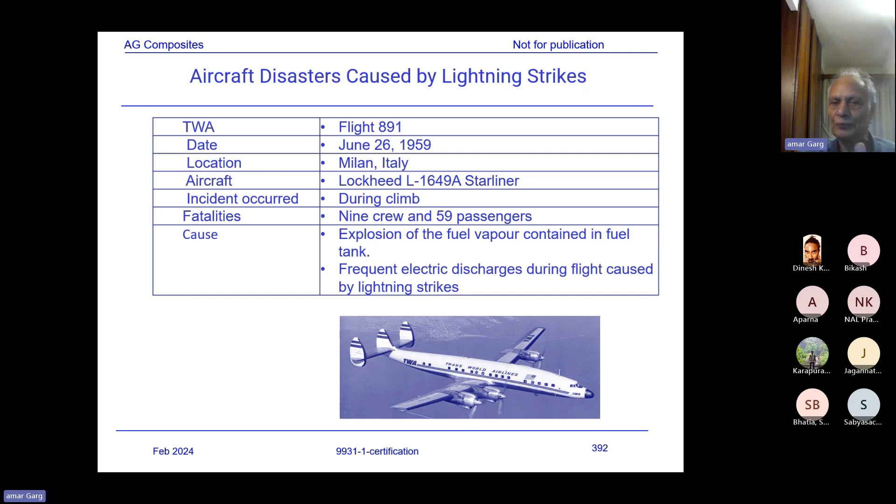So having said that, this is one accident, and there are other accidents I've reported here, one can look into Google also - this is a copy from Google. I won't go into the details, one can always search the details of each accident on Google. I'll send you this presentation once I finish the lecture so that you would have the final lecture notes.

Now let me go back - if there are no questions on this, I'll start the lecture where we left off last time and try to complete this maximum by this week. Hopefully I should be able to complete it. So I think I left somewhere...

So I was discussing last time the repair issues, and I left at that repairs.

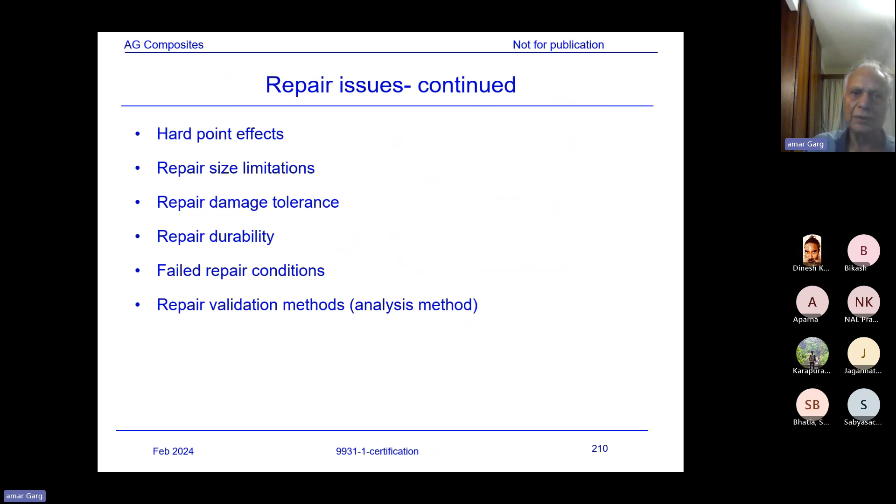Another thing for testing or compliance is production anomalies - when you are producing an article, there would be various manufacturing defects. Normal procedure is when designing the article and developing the data for allowables, you generate the data for the perfect design condition. But everything is not perfect in this practical world, and there might be situations where defects occur in production, which are quite common. As the production process matures, the number of discrepancies reduces significantly, but in the beginning there might be more. You try to understand the causes of those discrepancies and the remedial actions. So as the production line and designers gain experience, the anomalies also reduce.

But some of the anomalies which I have listed here, just for information - in composites, one of the things which happens quite often is wrinkles. Especially where there's a transition like curvatures, wrinkles might occur there, and of course in plane laminates also they occur. During the 787 program, initially we used to get quite a bit of wrinkles in some of the parts.

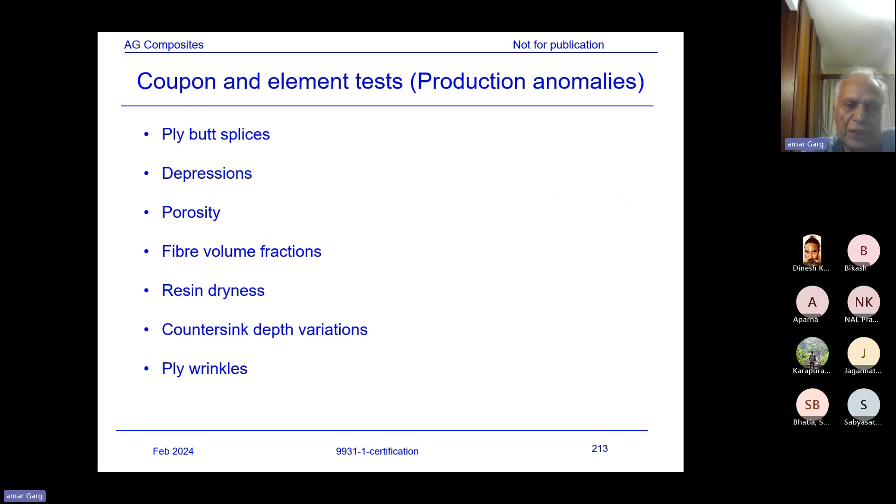So coupon element test production anomalies I've just listed here - splices, depressions, porosity, fiber volume fractions, because you will get a laminate which might have higher or lower volume fraction than what you designed for. Then you have to develop allowables or design values, knockdown factors for that. Allowables are basically for the basic design, and any other values become knockdown factors over that - fiber volume fraction, resin dryness, countersink depth variations, ply wrinkles, fiber breakouts at hole edges, delaminations, cure conditions, cooling and heating rates, cure time and temperature variation, extended cure cycle, off-axis issues. So there are lots of production anomalies for which you have to develop design values or knockdown factors - the effect of those defects, that's what I would call it.

Any questions so far?

No. Okay. Hello, Professor. Yes.

Actually, how do we assess, how do we know that these defects are actually existing in the component? Do we need to do NDT, or how to assess those defects so that we can do the coupon level test? Yes, good question.

When the part is produced in production, it goes to inspection. The quality inspector has to check and consider what the design drawing says. Suppose you get a hole that is being drilled, and you notice fiber breakout on the exit, the layer is broken. Naturally, that's a defect. So the quality inspector has to pick that up and report the defect. That is called Material Review Board, MRB.

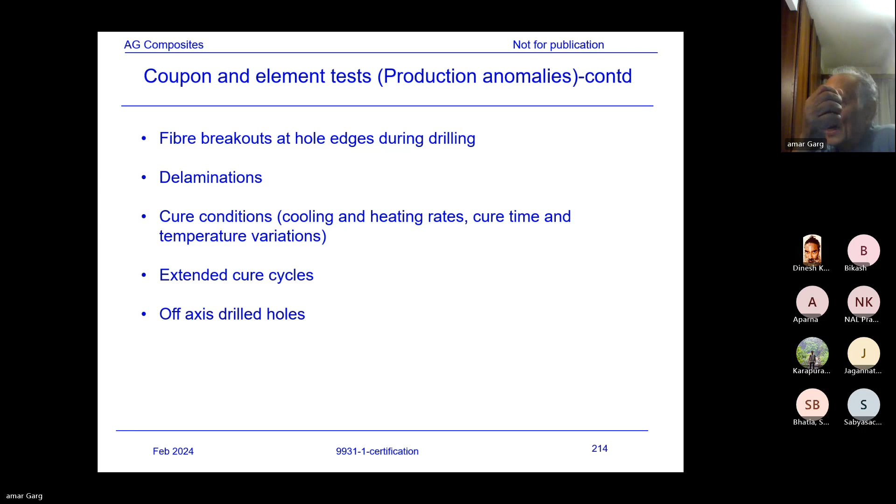So all these defects—in fact, I have not listed all of them. Misdrill, where you are trying to drill the hole here, but sometimes the drill bit may cut the hole a little bit off.

So naturally, you have to inspect it and see whether you can accept those defects or you have to repair them. Suppose there is a drill bit which has caused a little notch. Now what do you do to repair? You can't leave the hole like that. So normally, you will see whether you can use a larger hole and a larger fastener, if the fitting and region can take it, or use a plug, like a metallic plug. So there are different ways to fix those defects, but one has to develop the procedure.

I'm sure these things NAL would be doing, because even if you're experimentally doing the production, naturally these defects will be there. The possibility is there because everything is not perfect in this world. What I designed the component for doesn't mean production is going to be exactly that way.

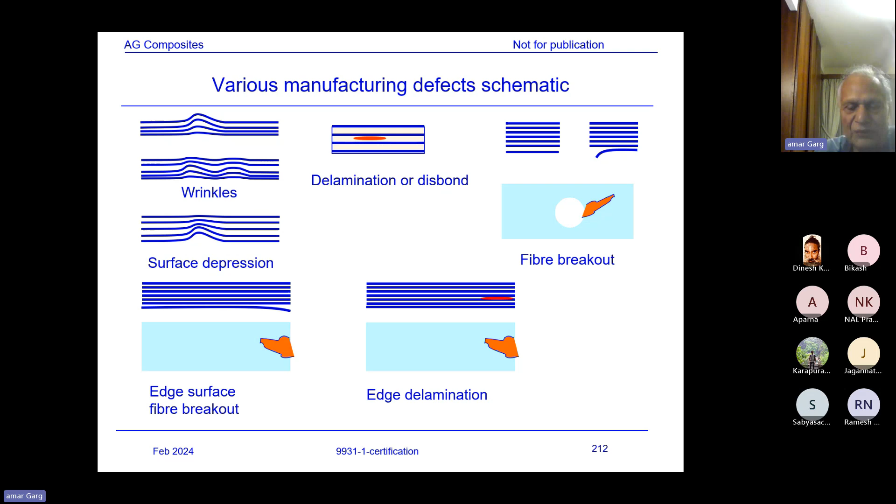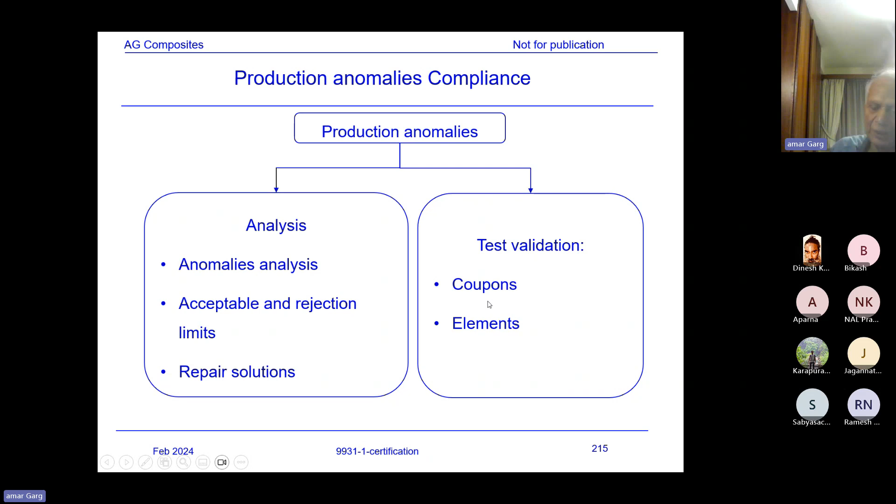If there are no more questions, I can proceed further. So basically, production anomalies compliance - as I've already discussed - production anomalies, you do the analysis, acceptance, rejection limits, then repair solution. So all the solutions you have to work out, which again, I say, is not a one day or two day job. It's hundreds of thousands of hours of job, all this, but it depends upon the program you're dealing with.

Vacuum assisted resin transfer molding - NAL has produced a part using resin transfer molding or VARTM. I don't remember what exactly NAL calls that process - resin transfer molding. So essentially, for vacuum assisted resin transfer molding, schematically the process is: tool preparation, apply release agent, then lay up the preform. The preform is basically a dry fabric - of course, it's not totally dry, it has some binders so that you can lay it up and the layers stick together. Then you put that in a vacuum bag and suck the vacuum to consolidate the assembly.

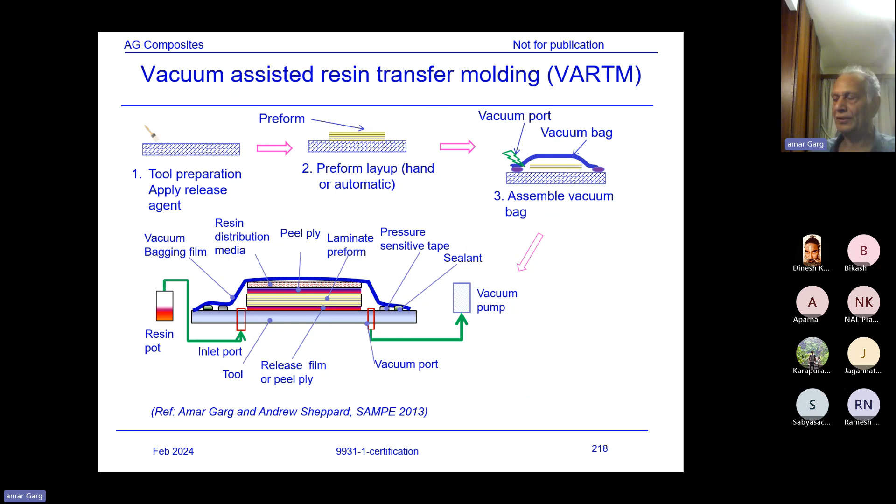Major materials processes: autoclave. I think I've lost some slides here, one of the autoclave slides is deleted. I don't know how I'll put that. But in the autoclave process, you're doing a similar process, but you are putting the assembly in an autoclave. An autoclave is an oven which is pressurized and can be heated up. However, the autoclave process is more expensive because the larger the autoclave, the more expensive it is to make for fabricating larger parts. That's why resin transfer molding processes are being used now, non-autoclave, which are cheaper. But it has its own advantages and disadvantages, which I'm not going to discuss now.

Autoclave process, VARTM - that is vacuum assisted resin transfer molding process. The materials for that: dry fabric, resin, binder, closed cell foam, sandwich. And for the autoclave it's a prepreg. Prepreg is fabric or tape coated with the resin, and core for sandwich structure.

Now, one thing is, if you are producing a component which needs a sandwich structure, you can't use resin transfer molding directly. The only way you can use resin transfer molding is, rather than using a Nomex core, you need to use a closed cell foam so that resin does not fill the cells. Because if you have a Nomex core and try to inject the resin, all the cells in the core will be filled with resin. So if you want to produce sandwich structures, normally you have to use the autoclave process.

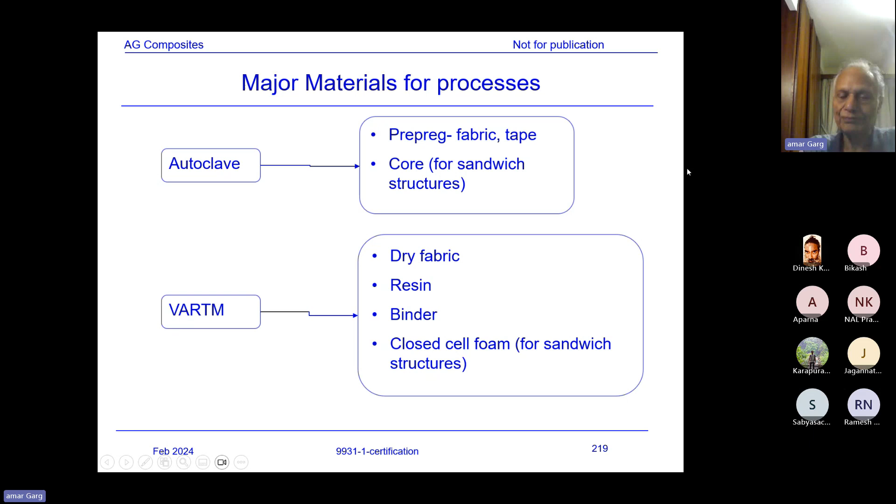Testing and validations. Now I consider an important issue over here for certification: testing and validations.

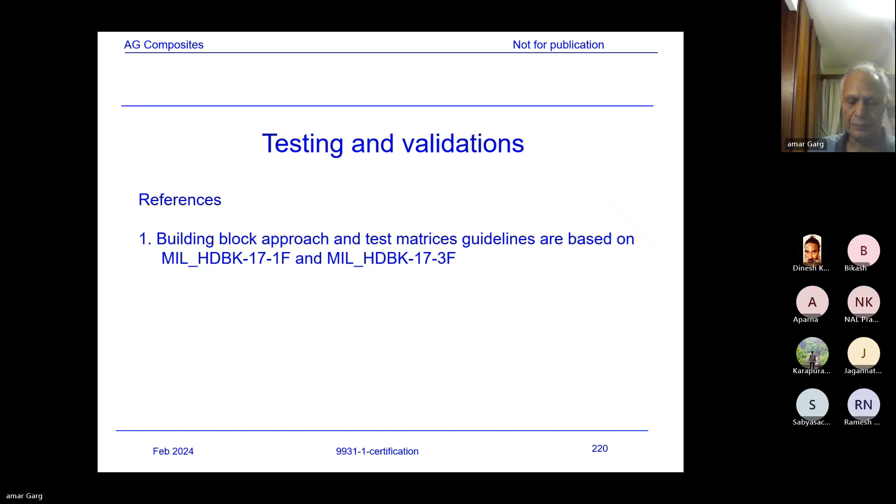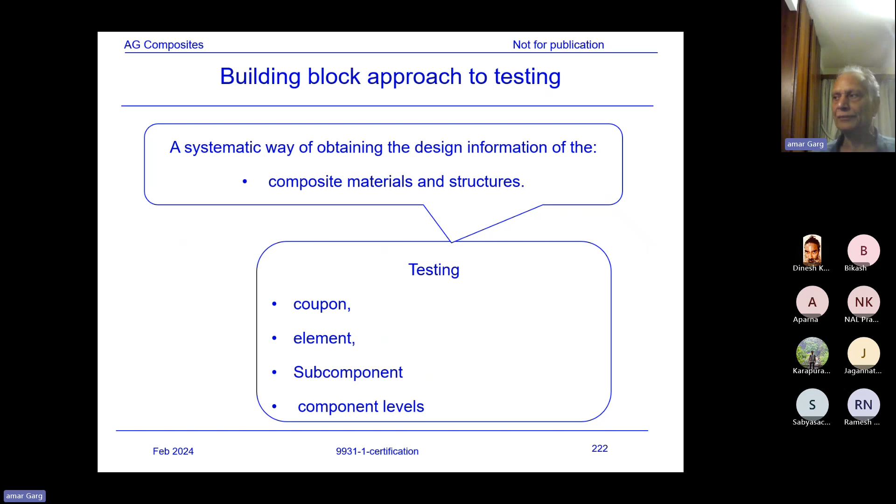We use the building block approach in justifying the design and testing of a component. Now, what is the building block approach? Building block approach for testing is a systematic way of obtaining the design information of composite materials and structures by testing coupons, elements, subcomponent, component. So you are generating - I'll show you the flow diagram - basically you are developing the allowables, then verifying the design using a building block approach. It's right to say this is a systematic way of obtaining design information, which develops the allowables, verifies the design, and finally gives you the perfect design.

Now, another definition: building block approach is the substantiation process using both testing and analysis in a program of increasingly complex levels. So you have a testing block, you have an analysis block, and this is a pyramid basically - increasing complexity for testing and analysis, which provides an efficient product.

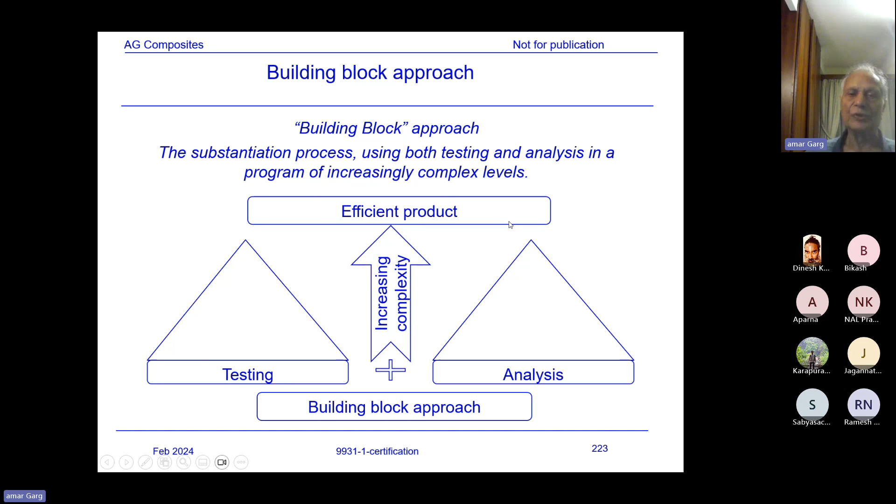Now, the advantage of the building block approach is reduced program cost and risk while meeting all technical, regulatory, and customer requirements. Because when you start from the coupons, they generate the allowables, design values, then you test some elements, then subcomponent, which will verify your design, and then component. So you are following a systematic design approach, and if you have a problem, you would know it in the beginning rather than at the end.

So suppose, as I had explained, the point design approach does not involve a significant amount of testing. That becomes expensive because you don't know some of the risks which may be there, and you only know after the component is produced, then some unknown risk appears. So the best approach is the building block approach, by which you will remove all major risks and surprises in the design.

The objective is to reduce program cost and risk while meeting all technical, regulatory, and customer requirements, and to make the design development process more effective in assessing technology risks earlier in the program, so you know the risk early on.

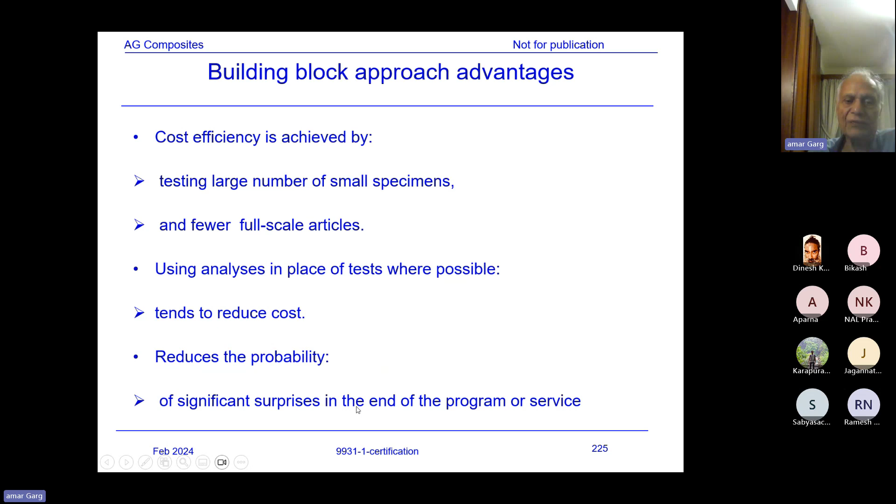Using analysis in place of tests where possible tends to reduce cost and reduces the probability of significant surprise at the end of the program. So it's basically a combination of analysis and testing.

This is a schematic of the building block test. In this block you have coupons and small elements, which are generic specimens, giving you a database of allowables and design values. Then you test some details which have structural design features, just to verify those features. Sometimes the coupons and elements may not cover the type of loading you might get in the details, so you verify the different loading systems which might be present in the elements, details, subcomponents, and components, which contain the structural features and provide and verify the design.

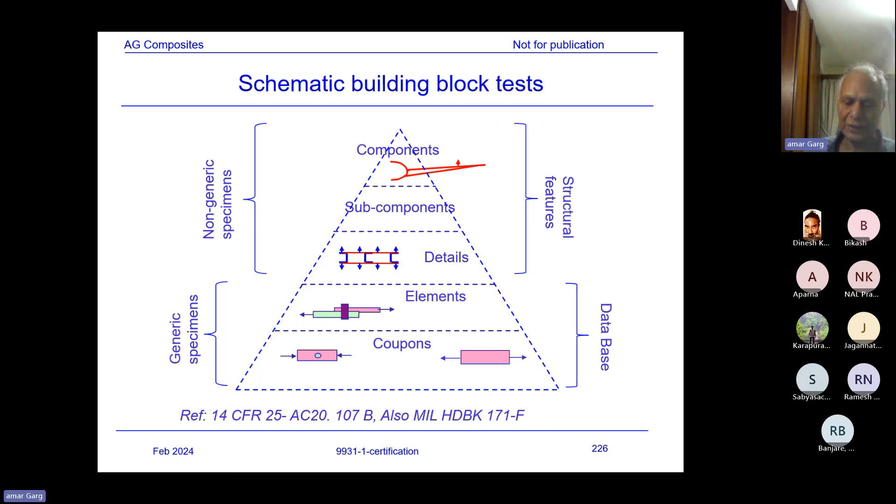Now, the way the building block approach works - this I have taken from MIL Handbook 17 - it shows three groups: group A, B, and C. Group A provides the material specifications and allowables development.

So the first block is material screening and selection. When you are launching a program with new materials, you have to select them. Suppose you do not have the materials to be used in the design - naturally, you're going to select the materials.

Block one tells you the procedure for selecting and screening the material. The second block, once you've selected the material, is materials and process specifications. The importance of this is that once you have the material, you have to develop specifications so you can provide them to the manufacturer, who then has to supply material according to your specifications. Unless you develop the specifications, you cannot provide that data to the manufacturer - that's the important part of this block.

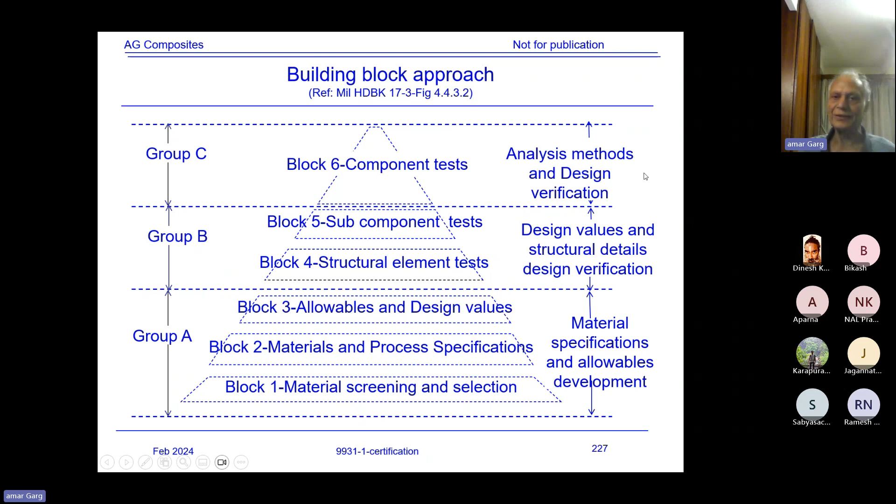Then finally, you do a component test in group C, which is analysis methods and design verification. Now let's discuss these blocks in detail, starting with block 1: material screening and selection.

In material selection, the objective is initial evaluation of new material systems under various environmental and loading conditions. You have to select the material based on some criteria - either you simply consider that you have a manufacturer, like Hexcel, who has materials like fabric, resins, or prepreg, which you'll just buy from them. That could be fine as long as it's useful to you.

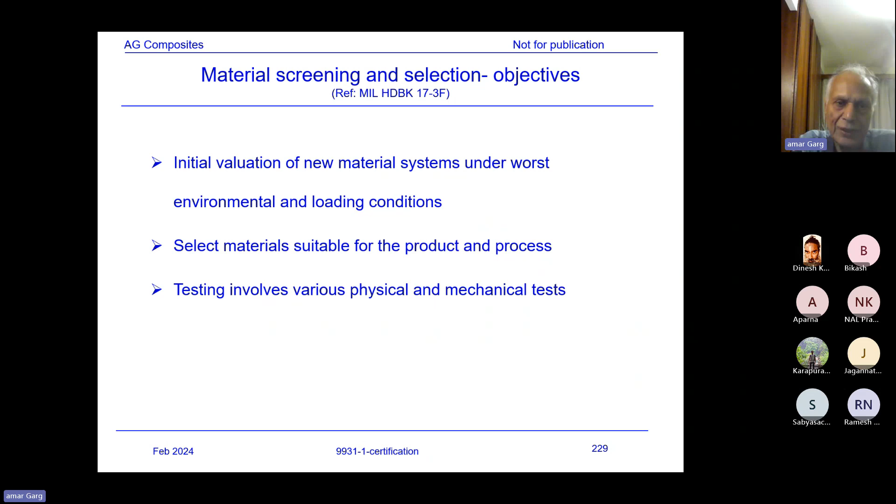But if you're looking for a material that is really optimum for your processes and design, you might have to do a market survey and then select the material based on that. You assess based on evaluations from manufacturer data and some in-house testing, selecting material suitable for the production process. Testing involves various physical and mechanical tests - material screening and final material selection.

So you have fibers, fabric tape, binders, resin, and prepreg. Fibers are clear, fabric tape is clear - but what is a binder? Those of you familiar with the resin transfer molding process might understand the binder more clearly.

The utility of the binder: if you are buying a dry fabric for your resin transfer molding process, and you lay up the dry fabric, it's very fluffy - you can't lay it up and make a preform.

Suppose you have to lay up 20 layers, what are you going to do? They are not going to stick to each other at all, they will remain separated. So the fabric will have some kind of resin spray, like 3 or 4% of resin sprayed on it.

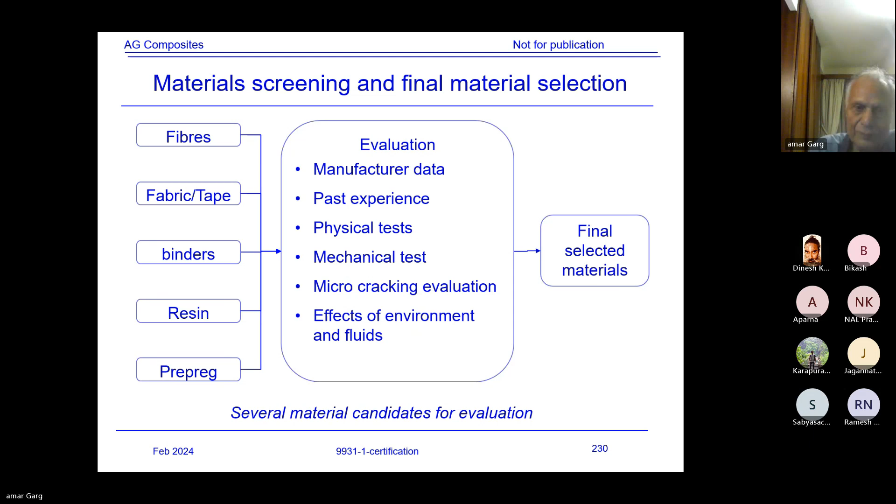Properties for evaluation - for fiber, you normally look into tensile strength, modulus, elongation at break, fiber diameter, density, and cost. For fabric or tape: areal weight, weave type, drapability, fabric or tape tolerance, and cost.

I'm not going into the details of each property because I've discussed various details on how you have to assess them. But these are the properties - just a general idea I'm trying to give you in this lecture. One would try to assess based on that.

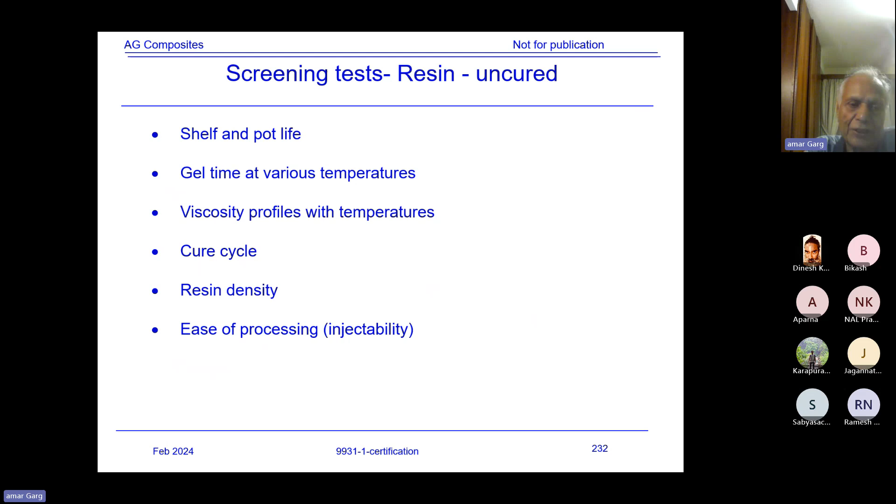Screening tests for resins, uncured: shelf and pot life, gel time at various temperatures, viscosity profiles at temperatures, cure cycle, resin density, ease of processing, that is injectability, density, tensile and compressive strengths and modulus, fracture toughness, moisture sensitivity, adhesion with fibers, glass transition temperature, dry and wet, material operating limits, thermal coefficient of expansion, chemical shrinkage at cure temperature, coefficient of moisture expansion.

Now it's getting a bit heavy for you people, but each of these properties has to be assessed. And naturally, if it's a design program or development program, all these properties have to be evaluated - whether through in-house testing or based on manufacturer data that has to be assessed.

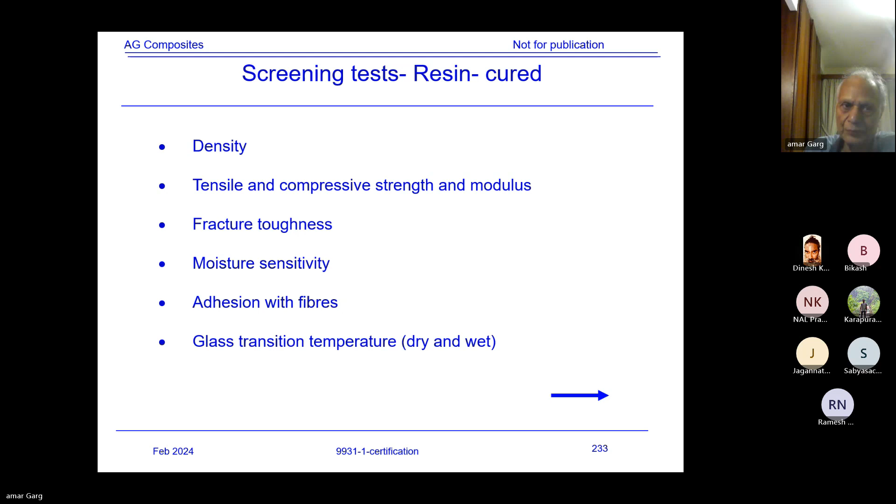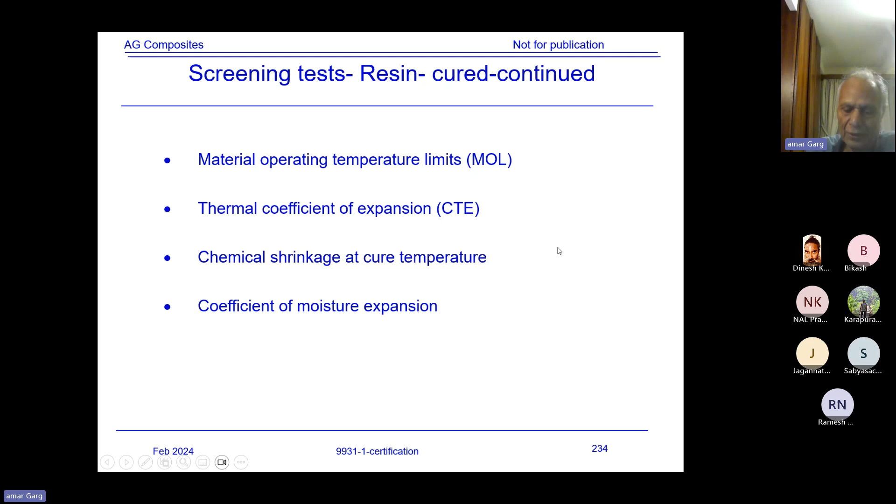Now, one of the things I have listed is material operating limits. What is this material operating limit? I thought I might just try to explain the meaning of material operating limits. What happens

in the composite, these matrix materials, which are organic matrix materials, are sensitive to moisture and temperature. So with increase in temperature and moisture content, the properties degrade. That means your usable temperature depends upon the material properties when they start degrading. So naturally, when selecting the material, we have to see what temperature we can consider as the allowable limit for operation of that material.

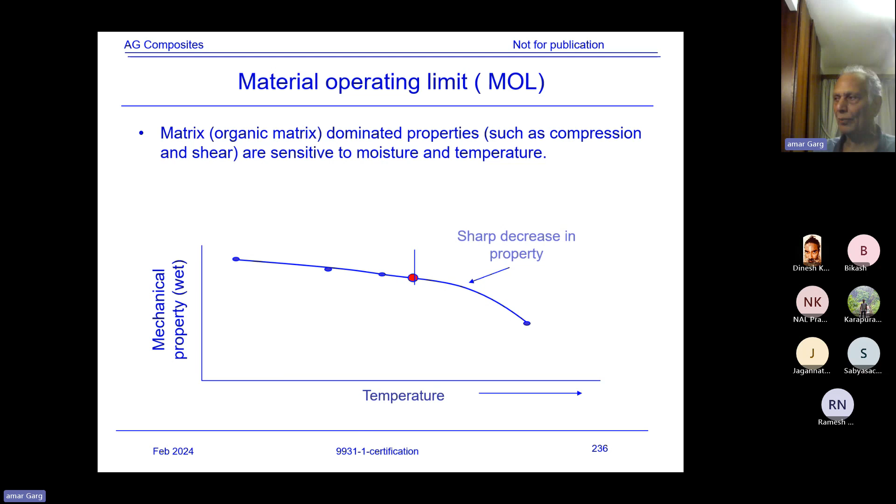So that is why you try to define a material operating limit. Material operating limit is defined as a characteristic temperature beyond which a dramatic reduction in material property would occur. Like open hole compression, which is matrix controlled, will degrade significantly after a certain temperature. Same thing with shear. The reduction in material properties may become irreversible beyond MOL.

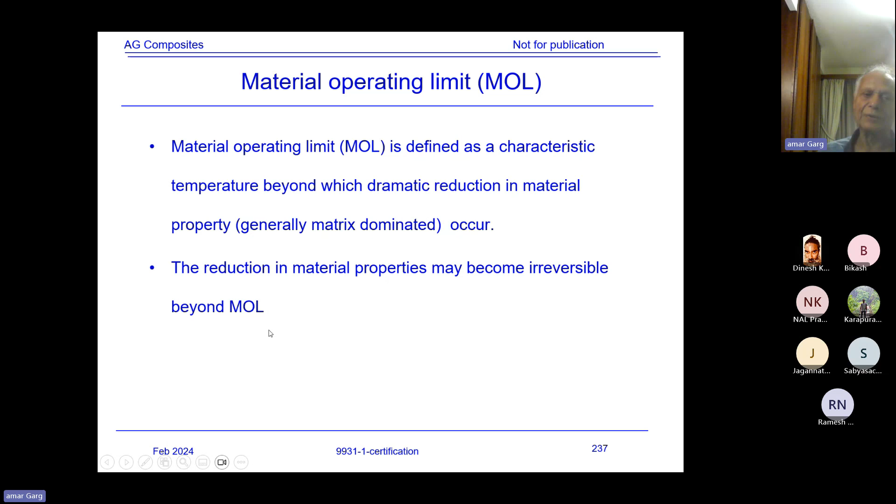Now, MOL criteria - there are two approaches by which you can define the material operating limits. One is based on mechanical property, normally in-plane shear modulus and open hole compressive strength degradation with moisture and temperature. The second is the wet glass transition temperature. So MOL is the lower of the mechanical property and TG approaches.

I've shown this schematically - the mechanical property. What you're seeing qualitatively is a sudden decrease in the material property at this temperature, which we could call T degradation, or if defining it with glass transition temperature, it could be called TG wet.

So the material operating limit we'll define as some T operating maximum, beyond which we will not try to operate our aircraft or material. We will design it for that.

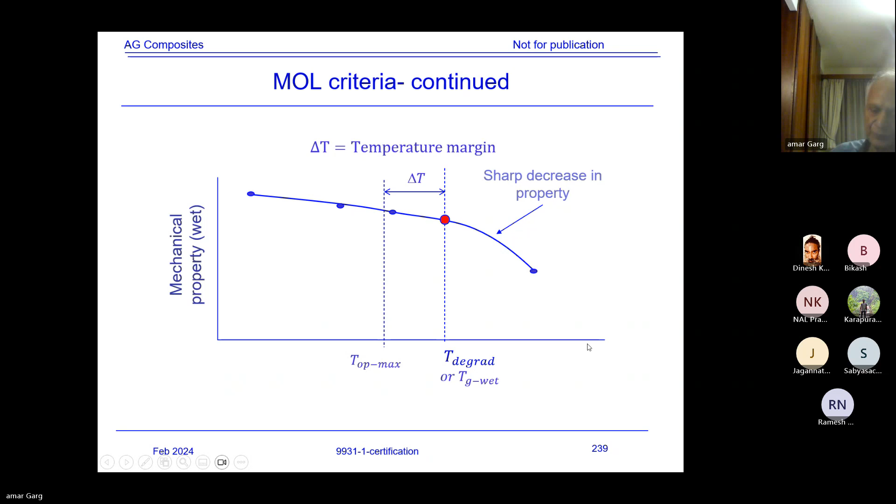I've shown delta T1 as 50 degrees. According to FAR, the operating limit should be the degradation of glass transition temperature minus 28 degrees centigrade, or 50 degrees Fahrenheit. Now for delta 2, I don't have any specific criteria, but I think one could use 50 degrees Fahrenheit for delta T2 also to define this.

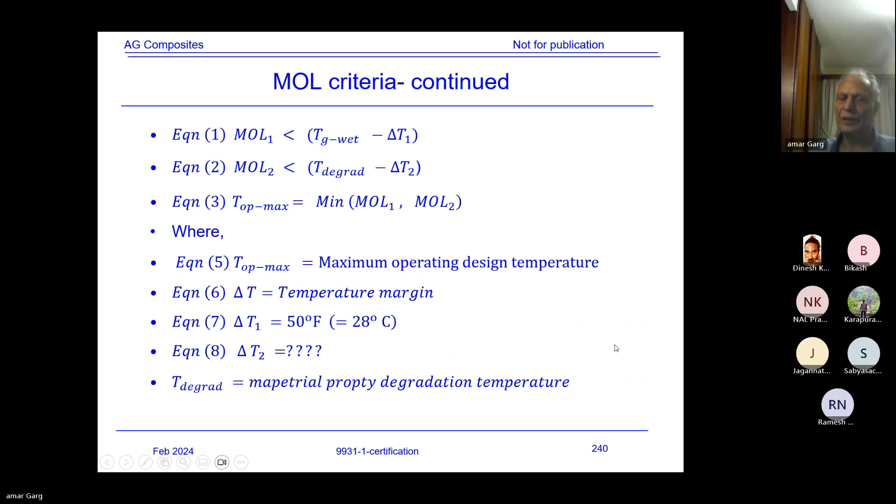So, any question on this material operating limit?

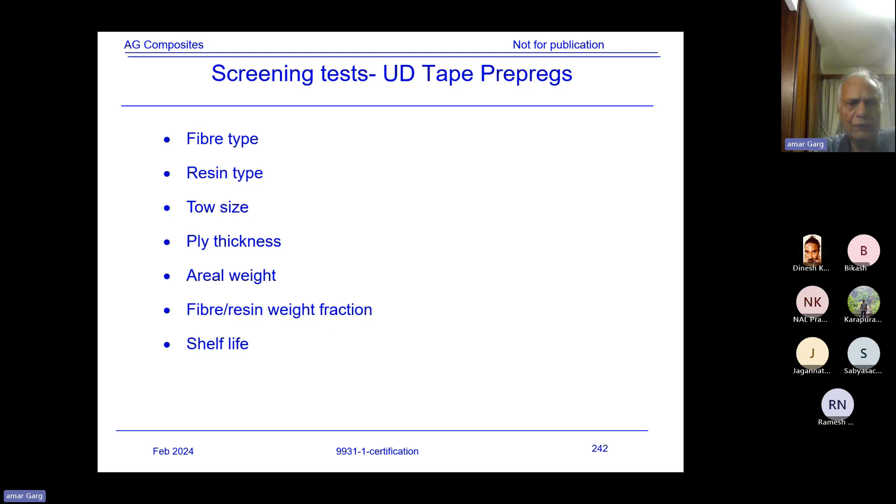Screening test for UD tape prepregs: fiber type, resin type, tow size, ply thickness, areal weight, fiber resin weight fraction, and shelf life.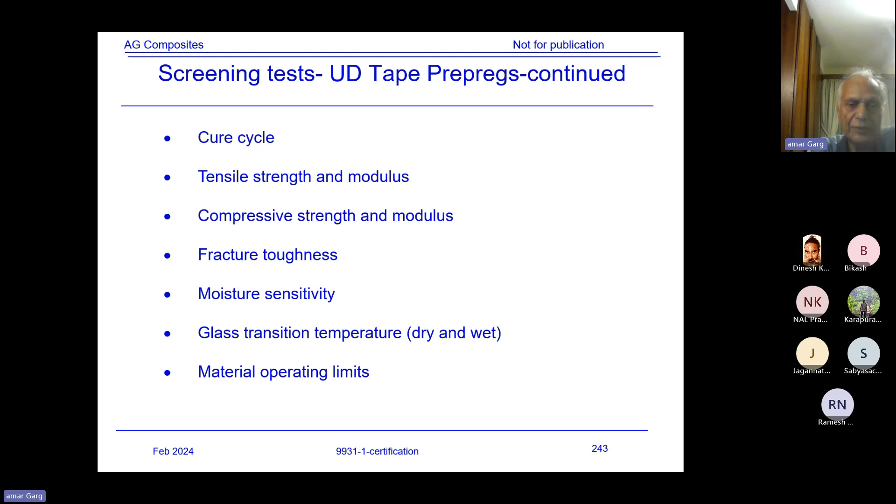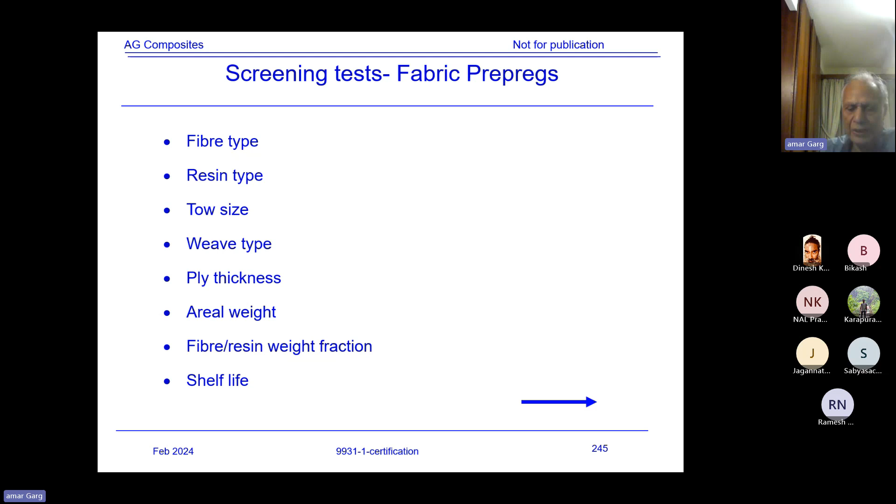Fabric prepregs, I'll just pass this quickly because they are similar to what we've said for the tape prepreg, so I won't repeat it.

Binder material, what are the tests normally done? Binder provides the bonding to dry fabric for preforming and may enhance interlaminar fracture toughness. Evaluations include fabric adhesion characteristics, glass transition temperature, processability, density, areal weight of binder film, effect on fiber matrix interface due to binder, and effect of binder microcracking.

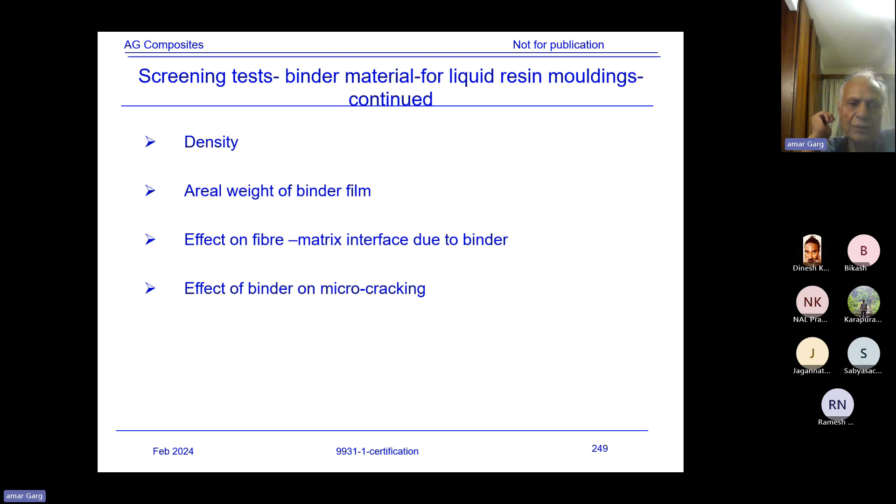So various properties one would try to evaluate. Again, I won't go into the details.

Now, screen test. Basically one could use these coupons as shown schematically: 0 degree unidirectional tension, 90 degree unidirectional tension, 0 degree unidirectional compression, 90 degree unidirectional compression, in-plane shear, open hole compression, open hole tension, CAI, and then the fracture toughness tests, double cantilever beam G1C and edge notch flexure G2C test. So various tests.

Again, I'm not putting the details because I've just shown schematically various coupons one could use.

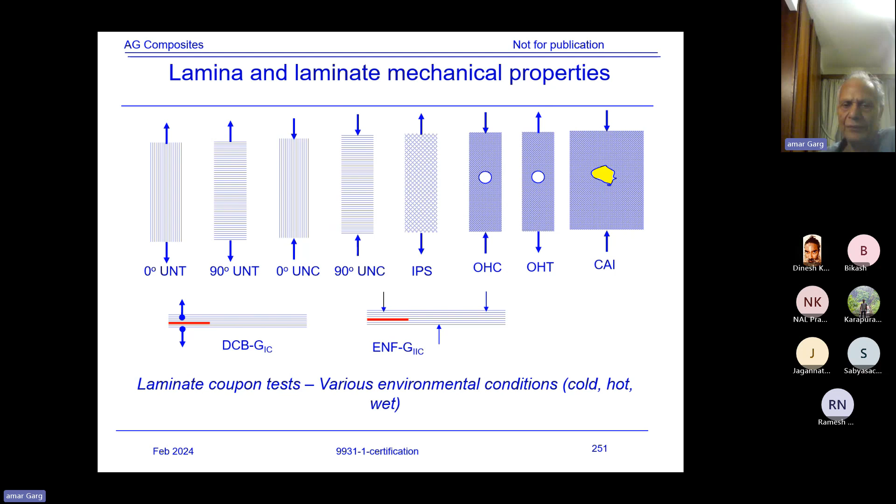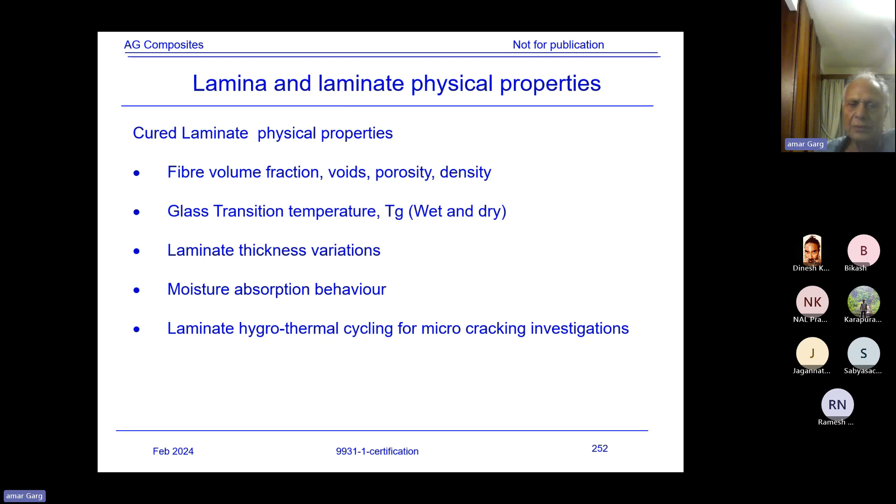Cured laminate physical properties assessment: fiber volume fraction, voids, porosity, density, glass transition temperature, laminate thickness variations, moisture absorption behavior, laminate hygrothermal cycling, and matrix microcracking investigation.

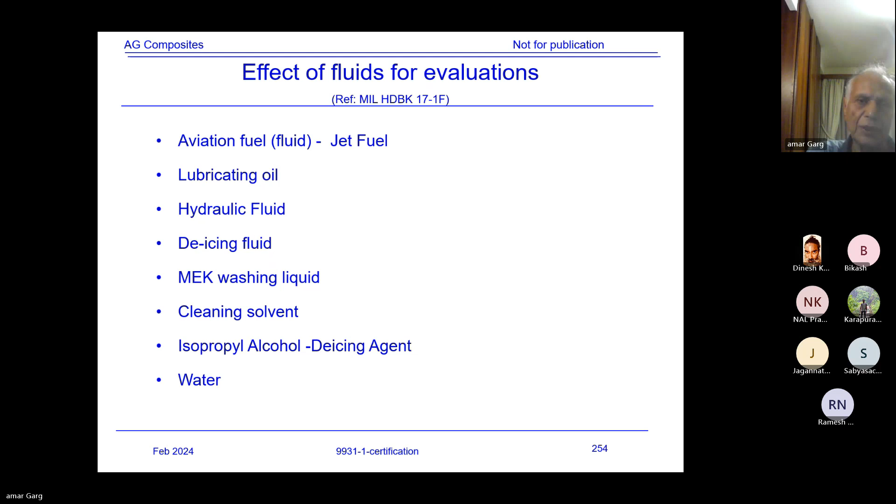So various tests. Effect of fluids evaluations: various aviation fuels, lubricating oil, hydraulic fluid, de-icing fluid, MEK. So various aviation fuels, one has to consider the effect on the composites. There are standard tests provided in ASTM standards, and MIL Handbook 17 also provides some details. One could look into that, but it's necessary when we're trying to evaluate new materials to study the effect of various fluids.

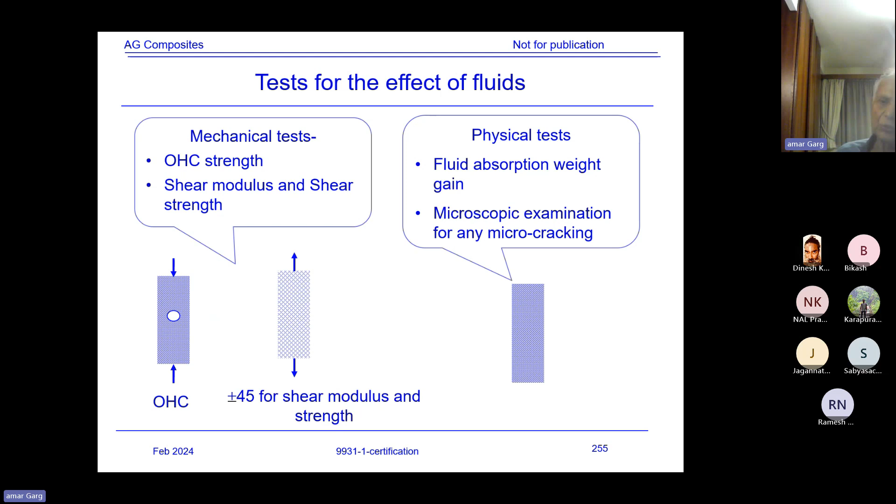And generally the test for fluids would cover the critical properties for the matrix, which are normally open hole tension and compression, and the shear modulus and strength, and some physical tests like fluid absorption, weight gain, and microscopic examination of any microcracking.

Laminate microcracking evaluation. Generally, what happens when you're trying to evaluate microcracking is that we cannot accept microcracking in our composite materials. Some materials might develop microcracking due to environmental effect, and we have to discard that material. That's why we do testing to ensure no microcracking is occurring.

If there are 1 or 2 cracks after 2,000 hours or 1,500 hours, you might accept it. But if there's a significant amount of microcracking, you reject the material and look for another material that doesn't develop microcracking. This is an important issue for composites.

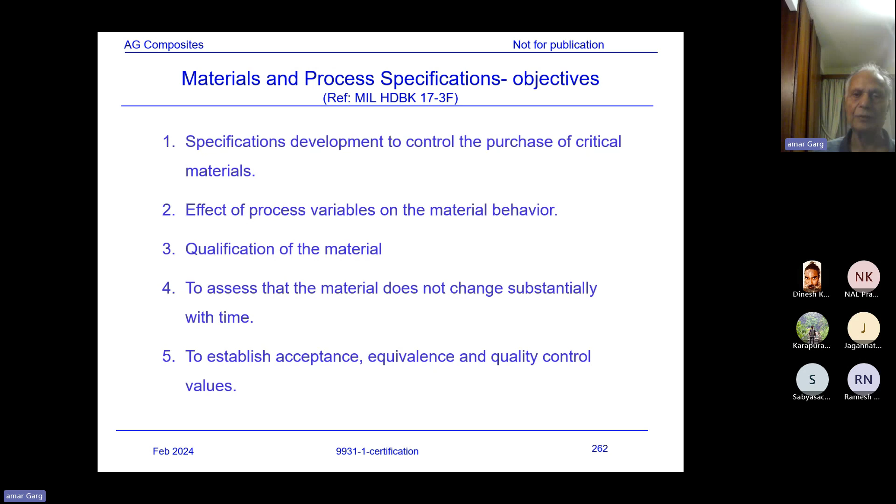So basically these two items are very critical: this one and this one - to purchase the material you develop the specifications, and to establish acceptance, equivalence, and quality control values. And how do you do that? You test different coupons for different properties and generate the values for material specifications.

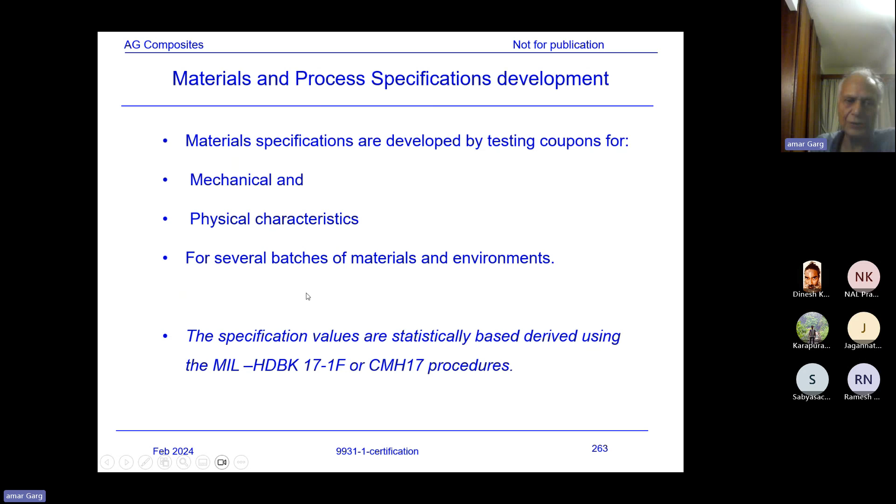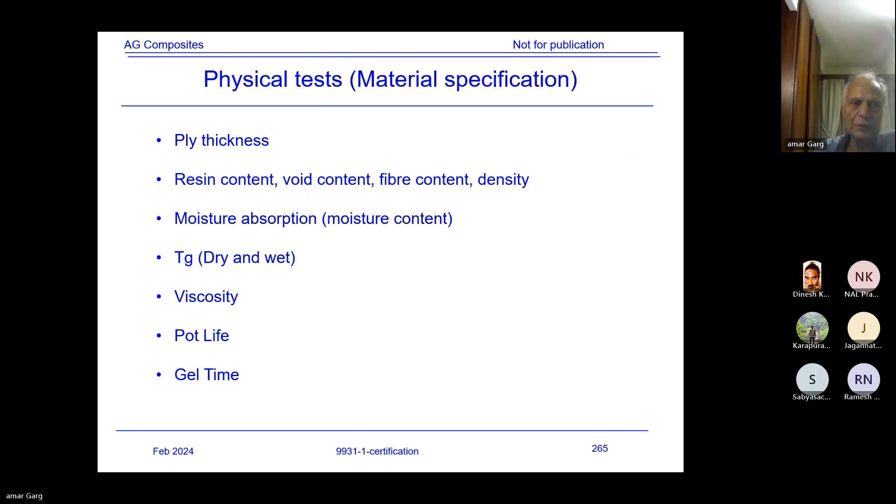Material specifications are developed by testing coupons for mechanical and physical characteristics for several batches of materials and environments. This is the same picture I showed you earlier, so similar coupons are done. Physical tests, ply thickness and all that, I'll skip that.

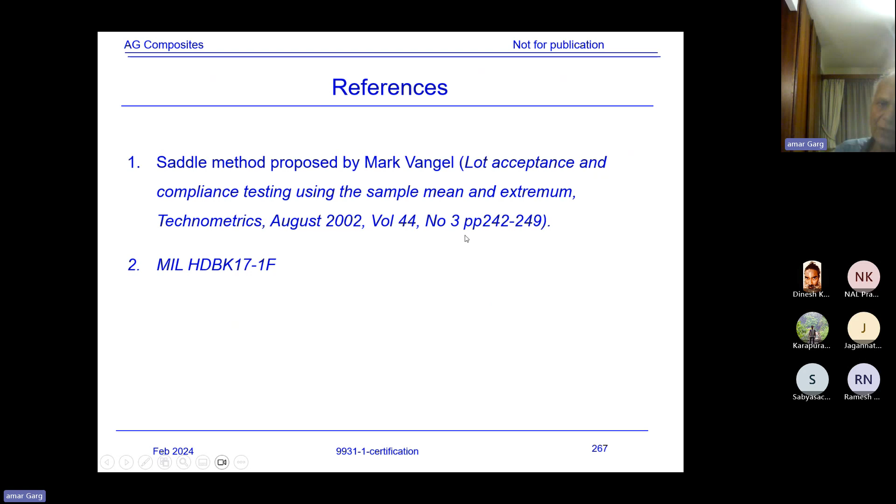Material specifications data analysis - I've given you the reference. Suppose somebody wants to understand how to analyze the material specification values, this is one of the references, or MIL Handbook 17 could also be used.

What you do here, when you have done the testing, is try to determine the maximum individual values and minimum individual values. There are some statistical methods given in that reference. The minimum individual is mu minus K1 sigma, and maximum individual is mu plus K1 sigma, where mu is the average value and sigma is standard deviation.

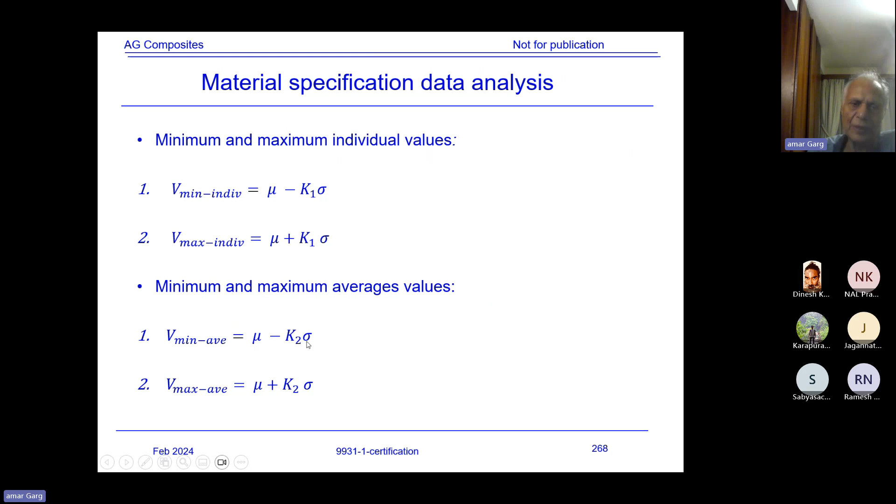K1 are the parameters given by that reference, and minimum, maximum, average values are given by this, where mu is mean, standard deviation, K1 is the extremum parameter, K2 is the mean parameter, and all the details are in this reference.

I won't repeat that. Then you develop a report for the material supplier, where various properties like minimum individual, minimum average, maximum individual, maximum average are provided based on this analysis. This goes to the supplier and your quality control department. The material supplier will then supply materials that comply with your requirements, since they do conformance testing when supplying the material, and you'll compare the values. Sometimes you might also run in-house tests just to check or verify those values.

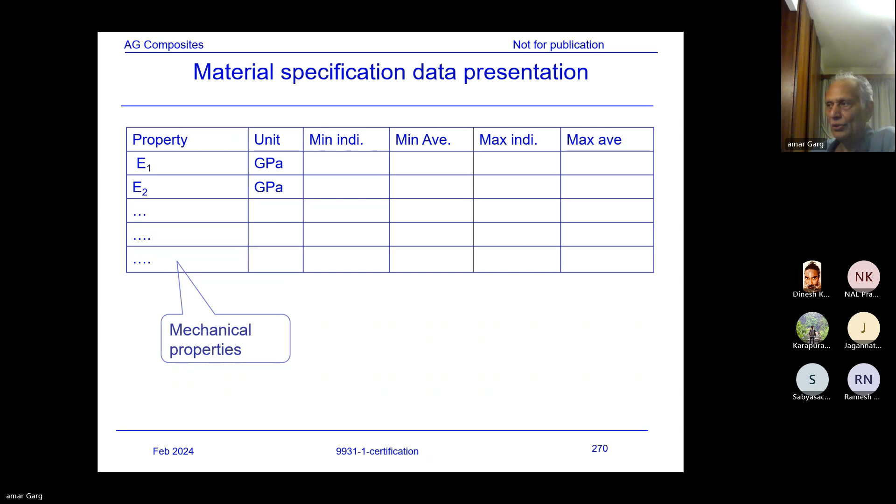Allowables and design values. Now, any questions so far, please do ask. Or is it not useful?

Hello? Yes, sir, it is useful. We'll ask questions, sir, please complete. We'll find some questions, okay.

I think so - allowables and design values now. Material allowables, as per 613, material strength values must be based on enough tests of material meeting approved specifications to establish design values on a statistical basis.

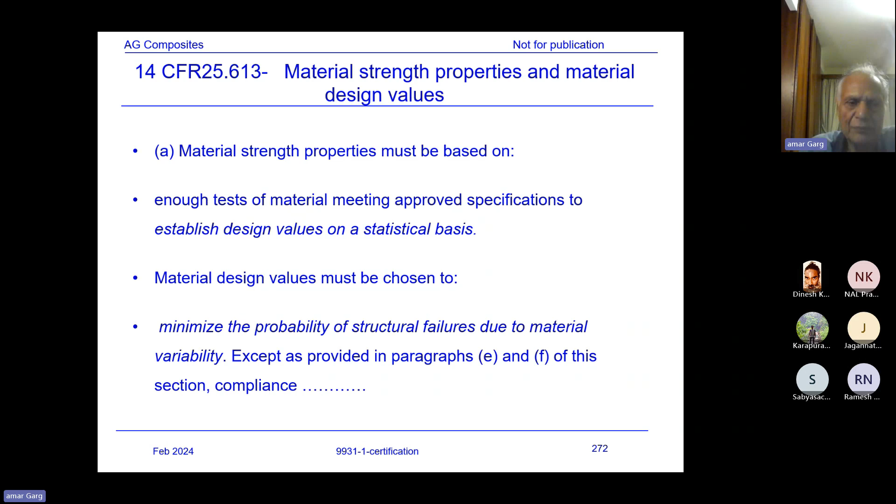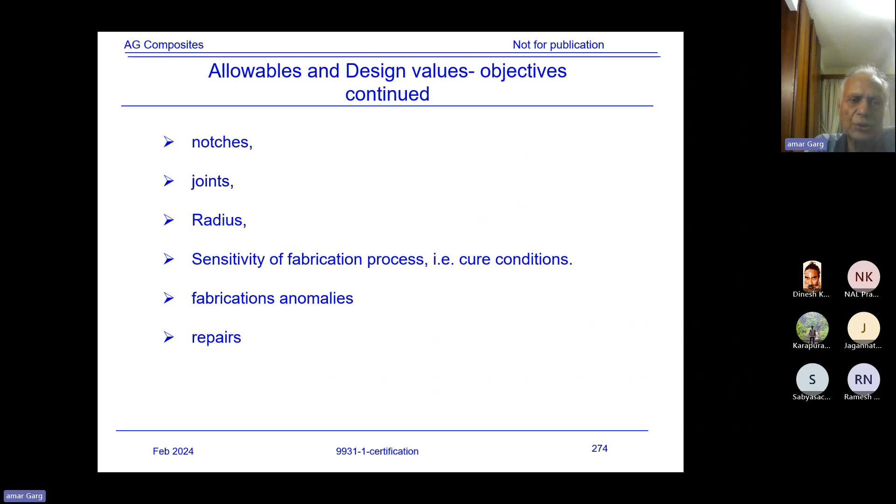So basically the allowables are developed using a statistical basis. Material design values must be chosen to minimize the probability of structural failures due to material variability, except as provided in the relevant paragraph of compliance. The purpose is to provide firm material allowables suitable for design, accounting for effects of layup, stacking sequence, laminate thickness, environment, notches, joints, radius, sensitivity to fabrication process, cure conditions, fabrication anomalies, and repairs.

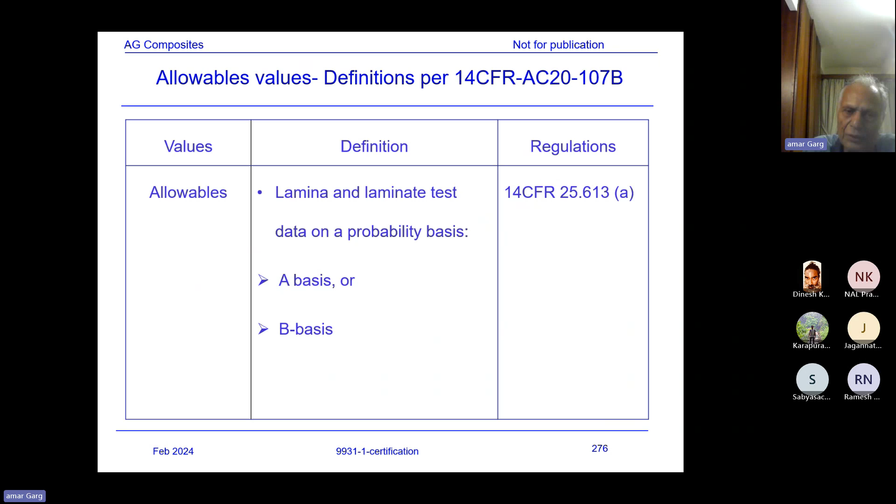Allowables are defined as lamina and laminate test data on a probability basis, so you could define them in terms of A basis or B basis. What are A basis and B basis? The definitions are written here. A basis is when 99% of values in the population lie above the A basis value with 95% confidence.

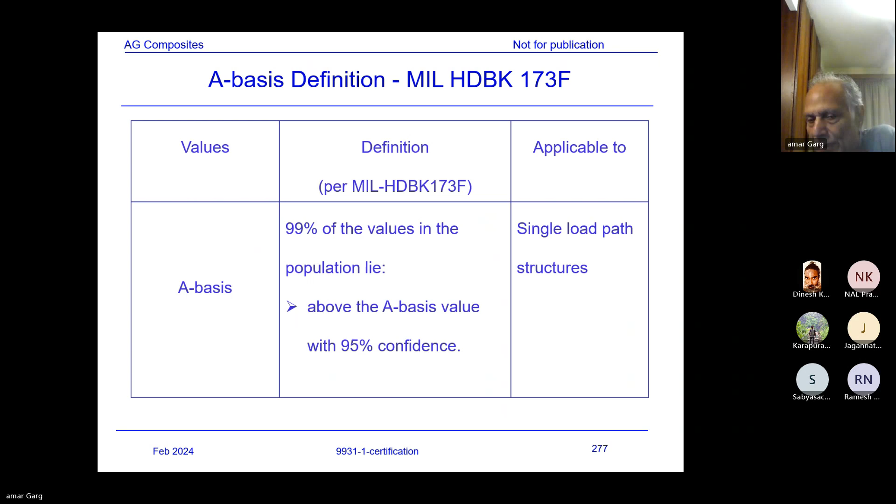So what happens when you are designing with A basis? That means there's only a 1% probability that the value might be lower than your design value. This is normally applicable to single load path structures, when you don't have redundancy - a single load path, that's where A basis is used.

Otherwise B basis is used. What is B basis? Rather than 99%, here 90% of the values in the population lie above the B basis value with 95% confidence. That means 10% of the data could be lower than your B basis value, but that is acceptable because you are designing the structure with a multiple load path structure, so there's some redundancy in it. That is why B basis is used.

What is design value then? We've defined A basis and B basis, but design value is basically a material property or load value that takes into consideration some program requirement. In addition to those allowables developed using a statistical basis, you might apply some kind of fitting factor, scaling factor, or cutoff levels, and that is how the design values could be provided.

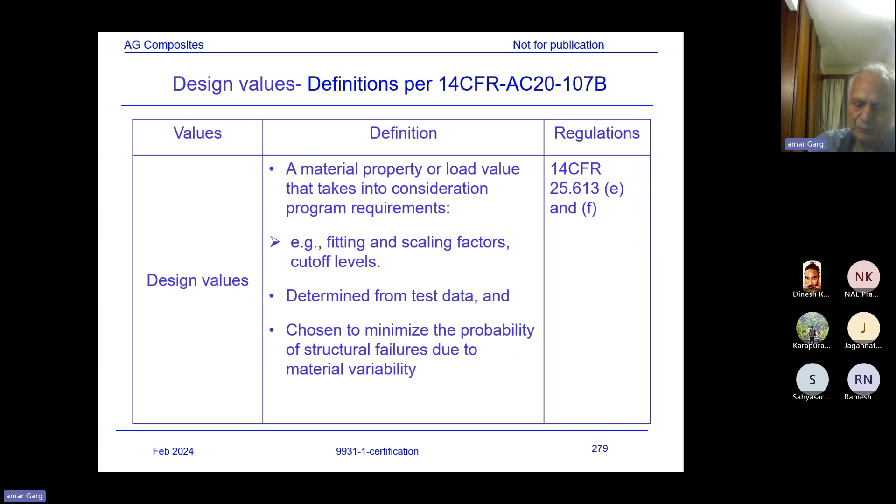Design values are determined from test data and chosen to minimize the probability of structural failures due to material variability, using some defined criteria. In a schematic chart, this is all the data - basically this line is the A basis line, and this is the B basis line. You can see some data lying here. In fact, I should have put some data points below this line and one below that line, but nevertheless, this illustrates A basis versus B basis.

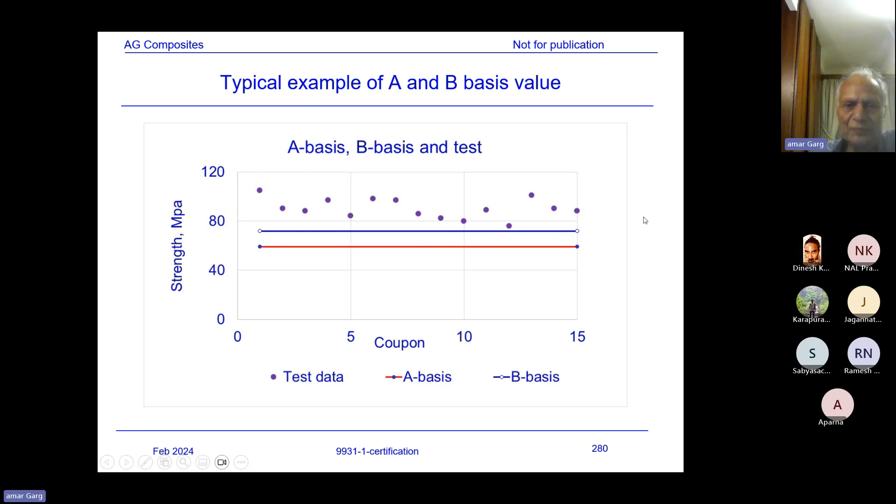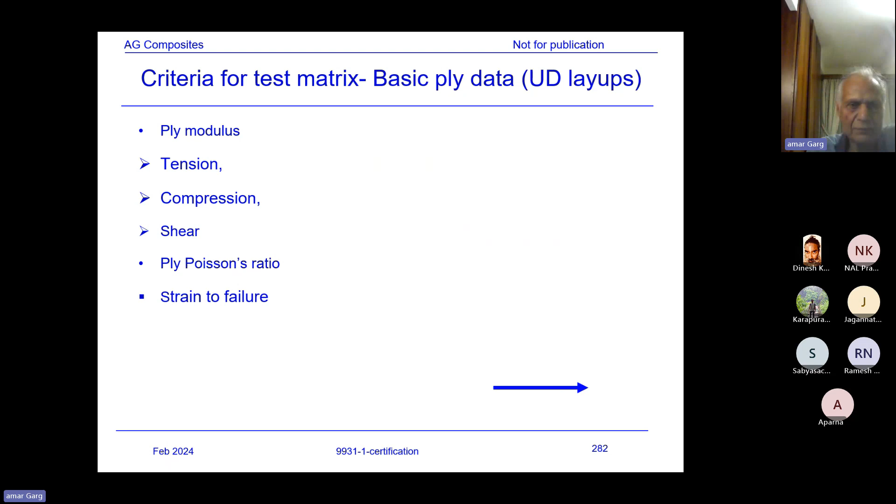Criteria for test matrix development: when developing the test matrix, you try to develop based on ply modulus for tension, compression, shear, ply Poisson's ratio, strain to failure, and laminate modulus for tension, compression, and shear, laminate Poisson's ratio, strain to failure, notched strength - basically filled hole, open hole, tension, compression, bending. Various values need to be generated when developing the allowables, because all these parameters are needed in order to design the structure.

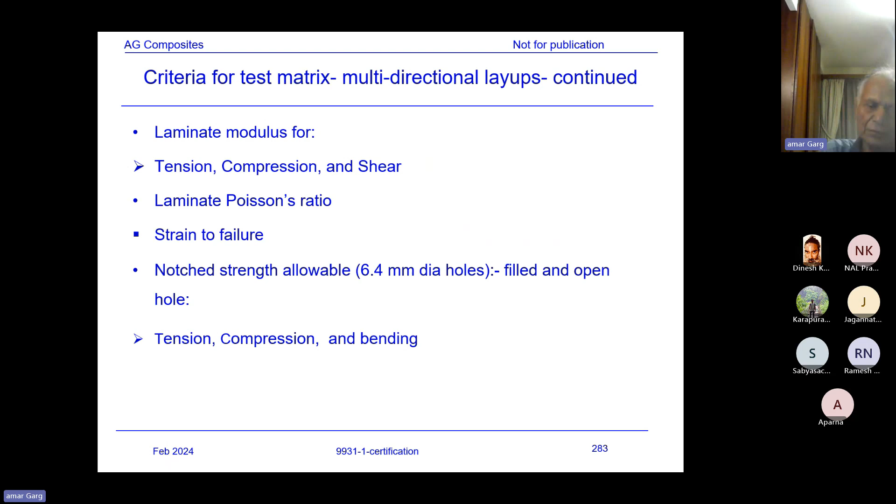Design specific features will have some joints, holes, notches, radius, etc., and compression after impact. So whatever features you want to cover in your design, you need to develop the design values and allowables for all those features. You develop the coupons, test them, and develop values. That's the purpose.

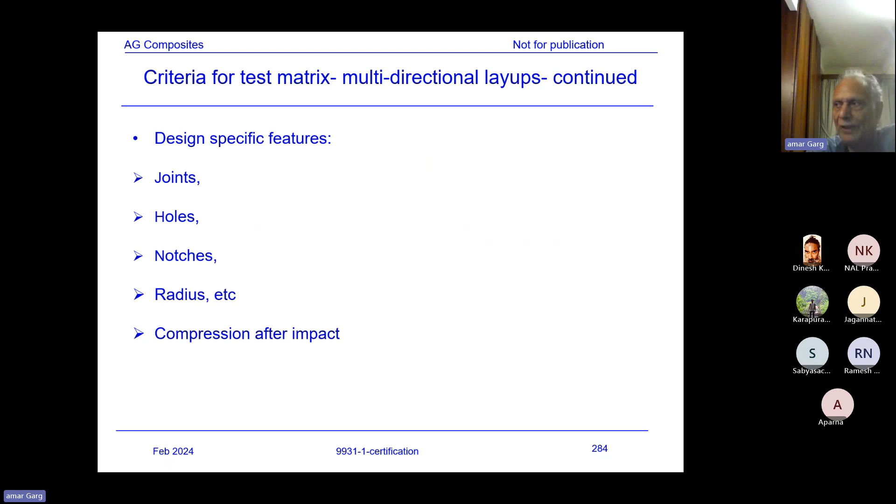There could be parameter variations like layup, envelopes, geometric parameters, damage types and sizes, environments, loading conditions, fabrication process, certification requirements. So when developing design values, suppose you are developing open hole compression in your design structure, there would be different layups, different thicknesses, environments. You have to cover cold environment, room temperature, and hot wet conditions. That way the test matrix multiplies rapidly.

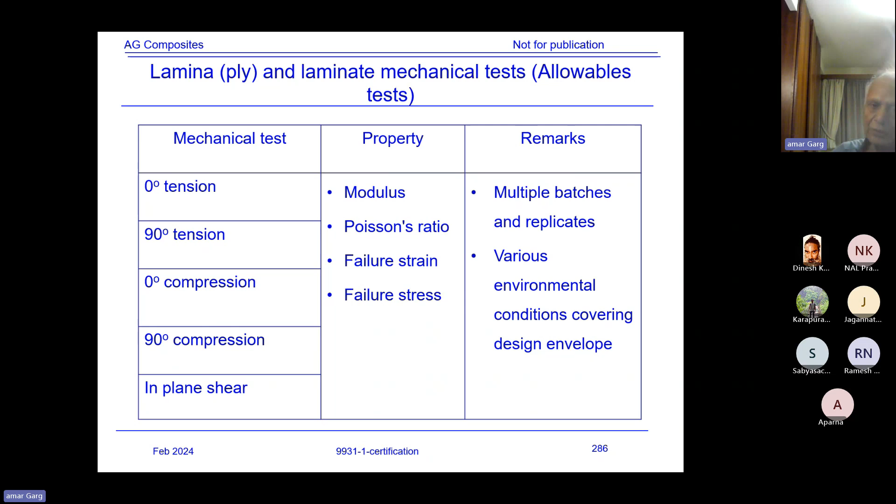So there will be hundreds of coupons, although they are looking at only 3 to 5 test types, and in each one, suppose you have 1 parameter variation with 6 coupons, and there could be several parameters. That means this test matrix would have almost hundreds of coupons for just this one. And this is not the only test - then you're having a laminate level test, and so on.

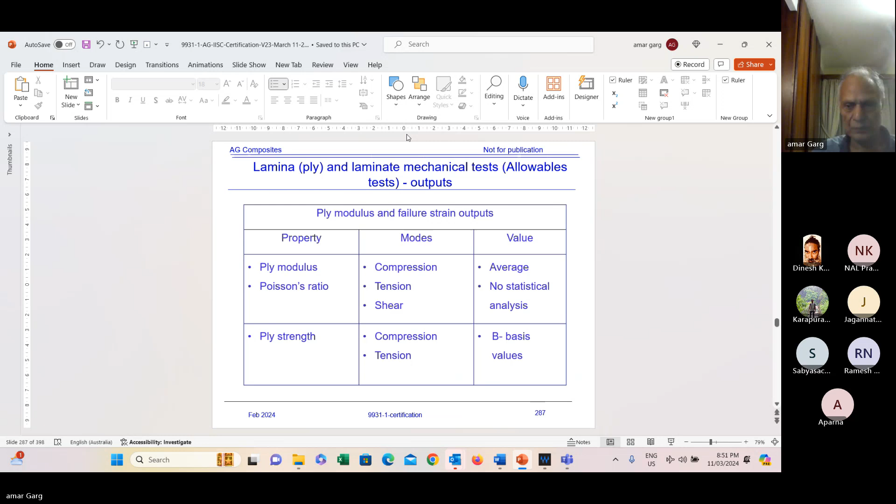Now, lamina ply and laminate mechanical allowables and design outputs. Basically what you are trying to do from ply modulus and failure strain outputs is determine the ply modulus, Poisson's ratio, for compression, tension, and shear.

Normally what happens is we don't do statistical analysis for the modulus - remember that, it's important in design. The modulus is normally calculated as the average. You do the statistical analysis, A basis or B basis, only for the strength values. This could be an important criteria for those designing and developing allowables: modulus is an average value with no statistical analysis performed, but strength uses B basis.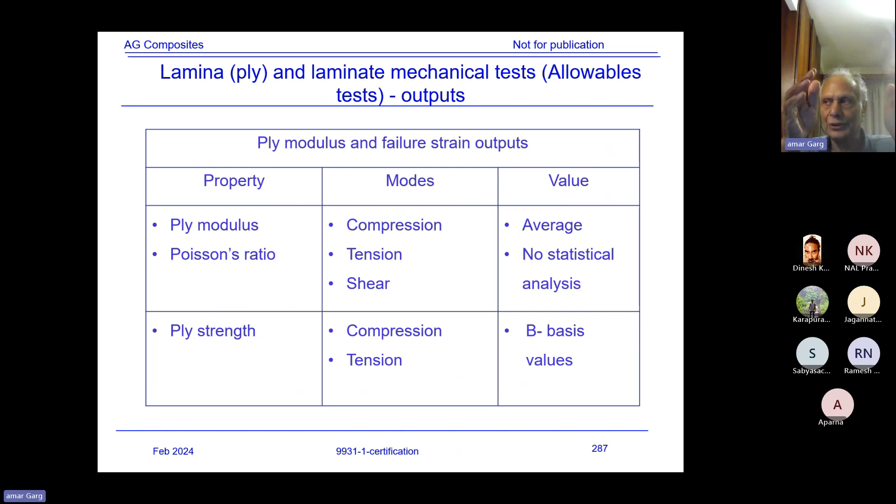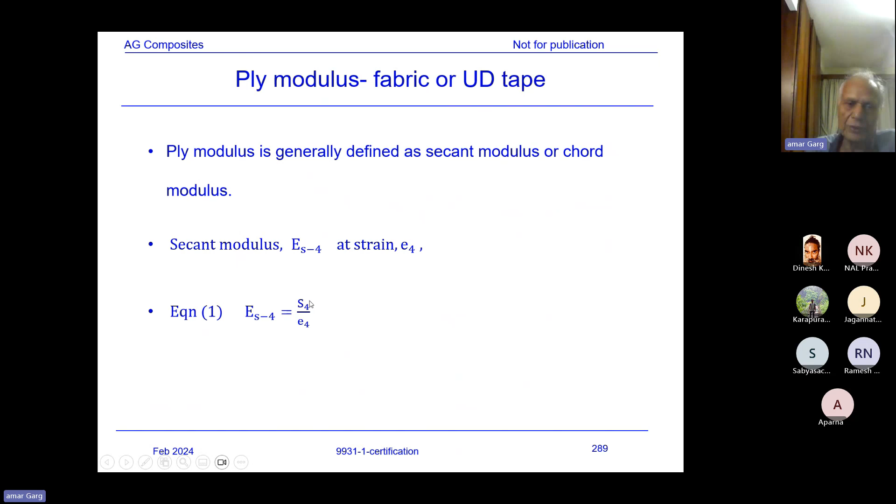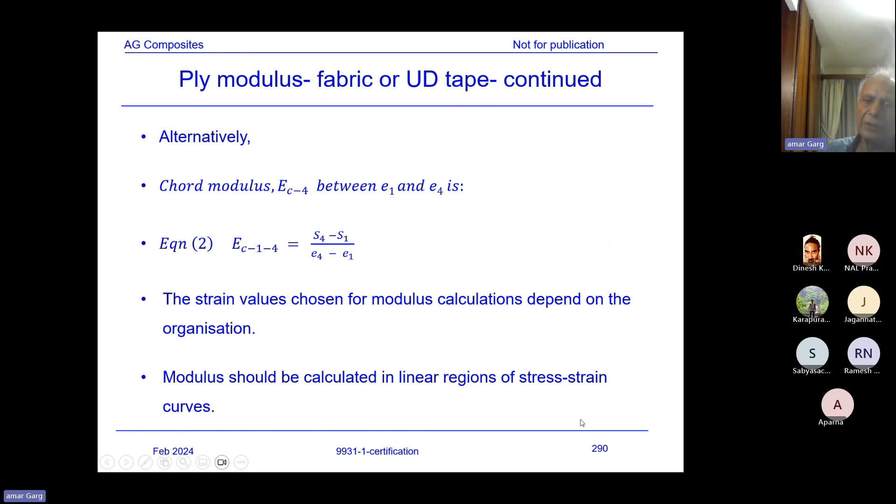For laminate mechanical test types - unnotched tension, unnotched compression - the modulus property determines modulus, failure strain, and stress for tension and compression. Test parameters include various thicknesses, layups, diameters, coupon width to diameter ratio, hole pitch spacing, countersink hole depth, fastener types and diameters. So various test parameters have to be covered. As I said earlier, when covering all these parameters, your test matrix could develop into a couple of thousand coupons.

So, Professor, these are the test parameters for the allowables? Yes. So how about - the reason being, your design would have different hole sizes, fastener sizes, layup variations. So you need to cover all those conditions. When developing the allowables, you need to develop them considering all those variations which go into the design.

Yes, yes. But how about the design value? Well, what you are trying to do for the design value is statistical analysis of the basic parameters, and then the variations from that you would cover as a knockdown factor.

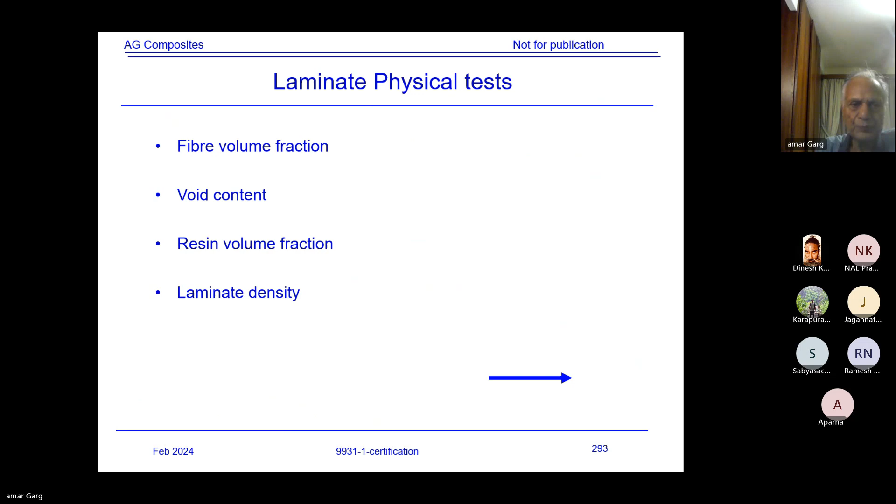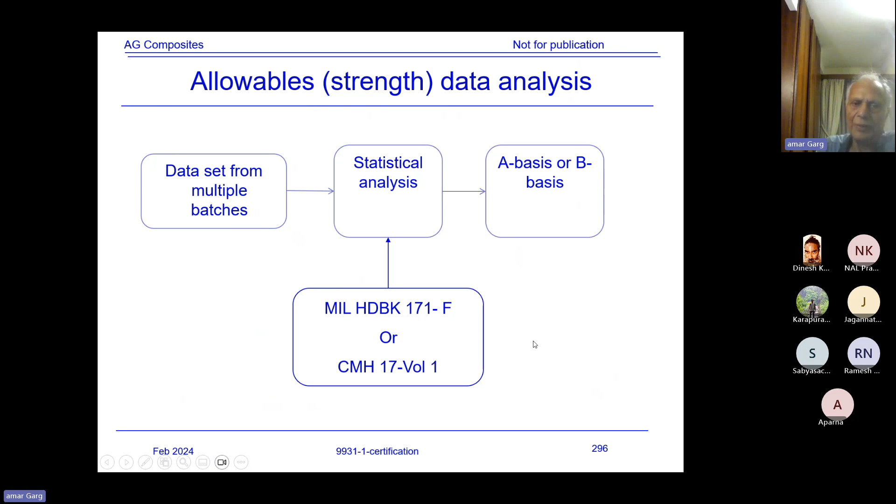I'll just skip this. Data analysis. So when you have developed for material batches, as I was telling, say like quasi-isotropic laminate with different batches of materials and say 30 coupons, then you will do the statistical analysis, determine A basis or B basis. The procedure you can use is based on the Mil Handbook 17, and there's a program available in public domain from NIST, the National Institute of Standards and Technology. One can download this recipe program and use it to determine the allowables. You don't have to write the program or software; this available software one can use to determine the allowables.

So suppose you use that procedure, you have determined the V design value. Sorry, allowable design value has been determined using this program, and that gives you V design baseline. Basically, say quasi-isotropic laminate, using the statistical analysis, you had determined the base design value, baseline. And when you have developed the parameter like humidity, moisture parameter, the hole size parameter, all those variations you can apply as the average value.

So determining, you test the hot wet coupon, you test the room temperature which you already have, compare the average values, determine the knockdown factors, and then develop some kind of parametric curves, like suppose this is strain, percentage 0 degree fiber, environmental behavior, hole diameter, thickness. So you will develop charts like that.

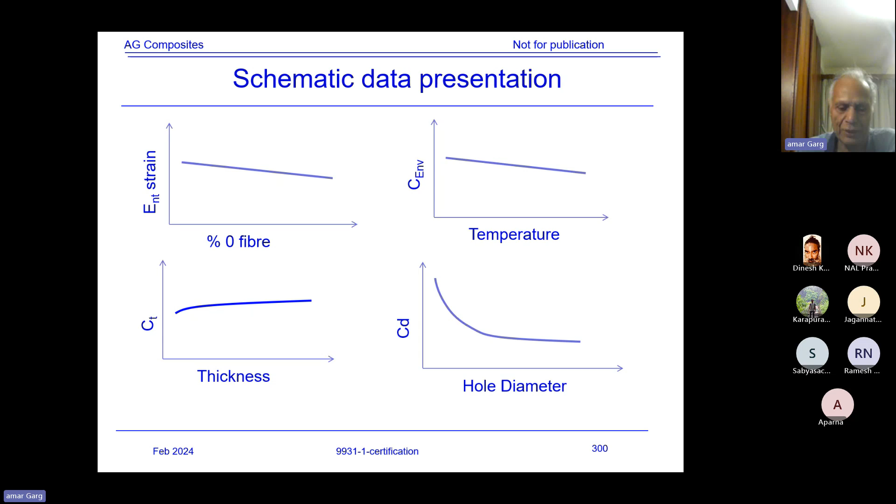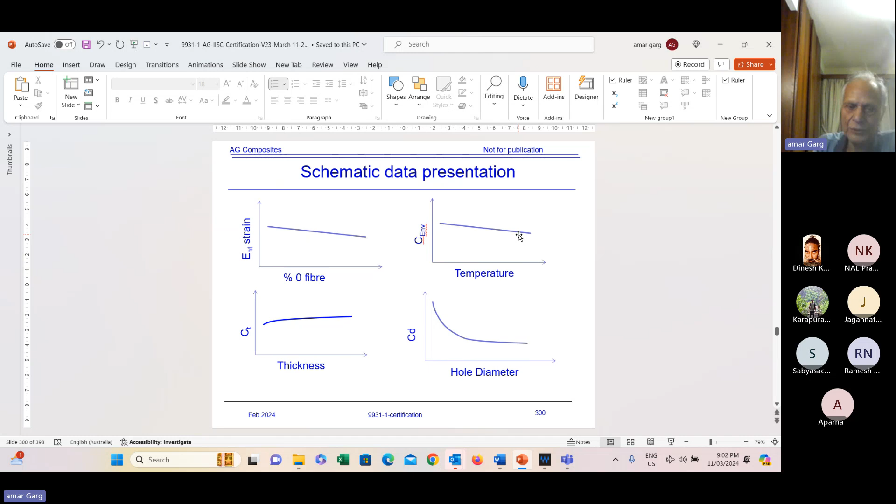Maybe what I'll do, I'll prepare another slide. I'll show you a bit more in detail to explain how you do it.

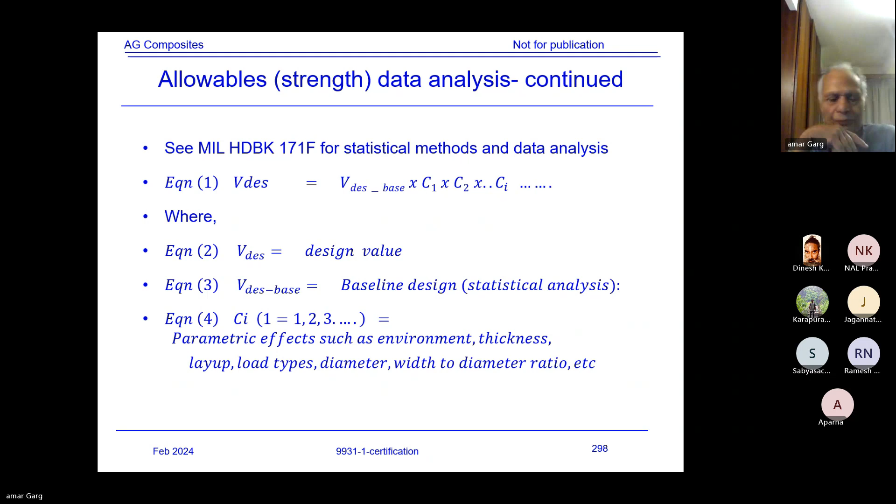Can you please, Professor, solve one problem actually, so that to understand these methods, if it is possible? I'll try to do that, but may not be. I'll just show some tabular thing. Okay, let me see what best I can do. Just hypothetically, I might just put some value. Yes, yes, that's what, to understand the method. Okay, done. Anyway, nice.

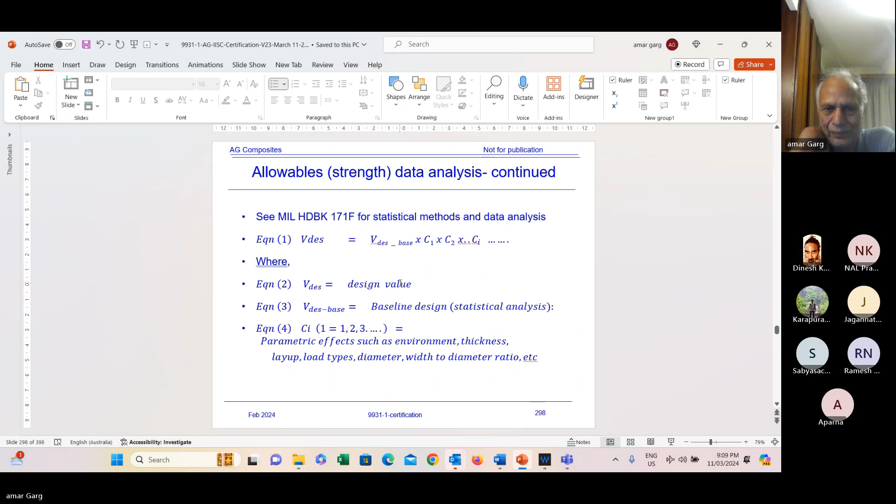I hope this will be useful to all of you, this building block approach, which I've been discussing, although I've been running a bit fast, but I thought some of the slides were quite repetitive, so I didn't go into the details. If somebody has any questions on this, I'm fairly open for detailed discussion, because I'm very familiar with the building block approach, which I've gone through during the 787 program. So I'm fairly confident about it, what needs to be done, what testing, various procedures. So it was a fairly elaborate program, and I've been lucky to be involved in that, which was quite extensive.